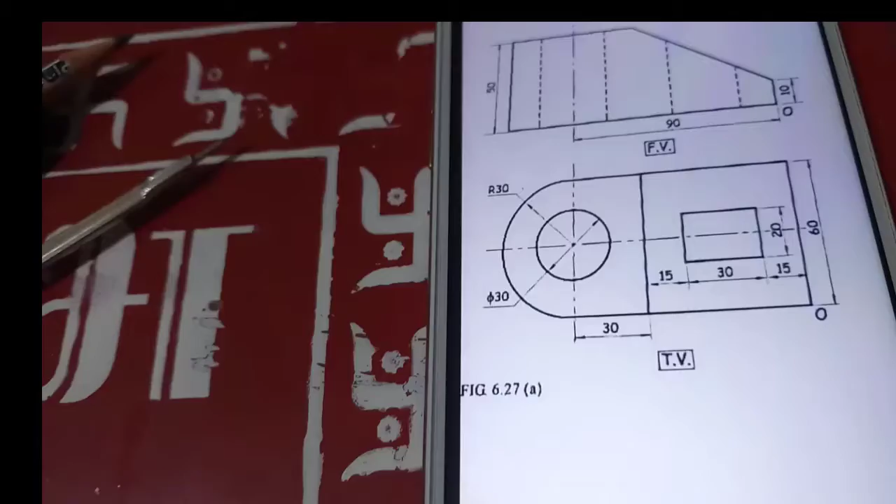Okay, so dear students, let us see this isometric figure, this orthographic figure. So in this isometric drawing, first of all you have to draw the rectangular box. So in that you should know the length, width and height of the box.

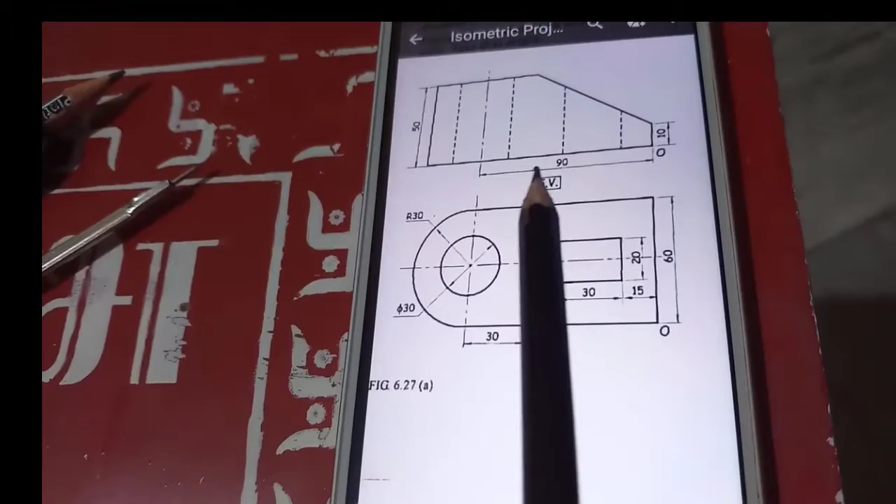First of all, see, you have to see the front view. From front view you will always get the length. So 90 distance is given, and from here till here the distance is given as radius 30. So 90 plus 30 is 120. First I will write down the length as 120.

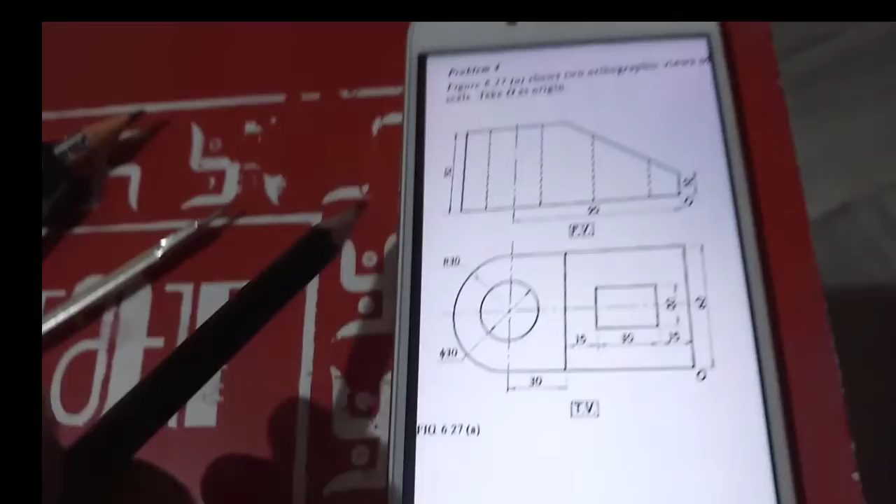Now see what is the height of the figure. It is 50, it is given. So height of the figure I am writing as h is 50. Then what is the width of the figure? Width always you will get it from the top view. So if radius is 30, both sides 30 plus 30 is 60. So width of the figure I will write as 60.

So first we will start with a rectangular box. I will mark one point O. This is our observer. Now you have to see on which side.

The length is 120. So where is the observer? Please look here in this figure. Observer is on the right hand side. So 120 length is on the left side. So from here now we will take 120 length.

First we will set the drafter at an angle of 30 degree. If I set here 60, it is 30 on the next side. So with help of drafter it is very easy. Just see, 120 length I am taking, and on this side also. This is our horizontal line. Both the sides you have to take 30 degree angle.

So what is the width of the figure? Width of the figure is 60. So from here you have to take 60 mm distance. And what is the height of the figure? Height of the figure is 50 mm. So keep your drafter like this and take 50 mm distance. So whenever you are drawing isometric drawing, it is very easy if you use a drafter.

Drafter is useful to draw the parallel line. So here 60 mm we have taken, so here also I will draw 60 mm line. Then here already we have drawn a parallel line of 120 mm. So take parallel to this line like this with the help of drafter, 120 mm distance again I am drawing.

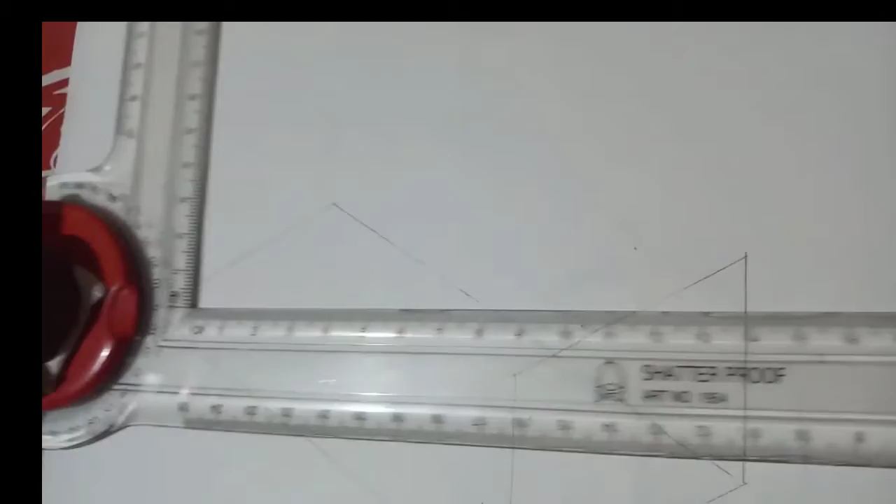Then we have to take parallel to this distance. So 60 mm distance also we have taken. Then draw 50 mm height from here. So from here we have drawn 50 mm. From here also we have drawn 50 mm.

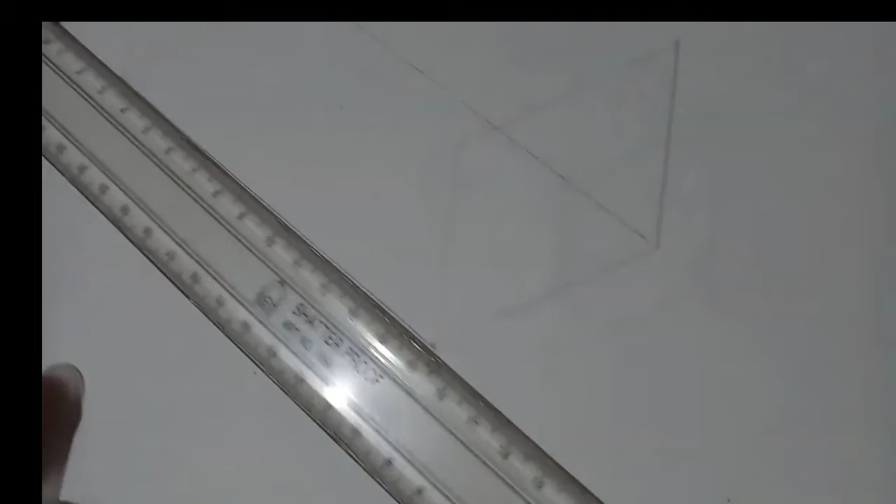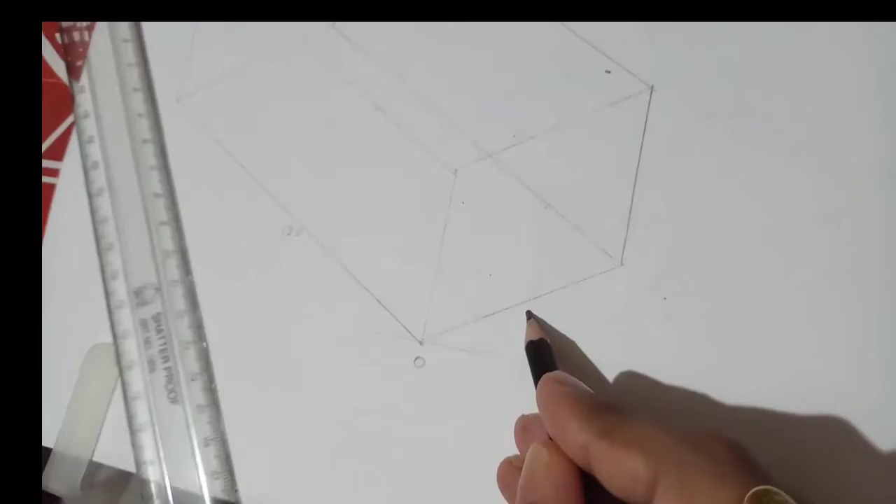So now our box is getting complete. We will set my drafter like this, and with the help of drafter we will join it. Yes, so all of you can see I have drawn the complete box. Length of this box is 120 and this distance is 60, that we have got it from the top view, and height is 50.

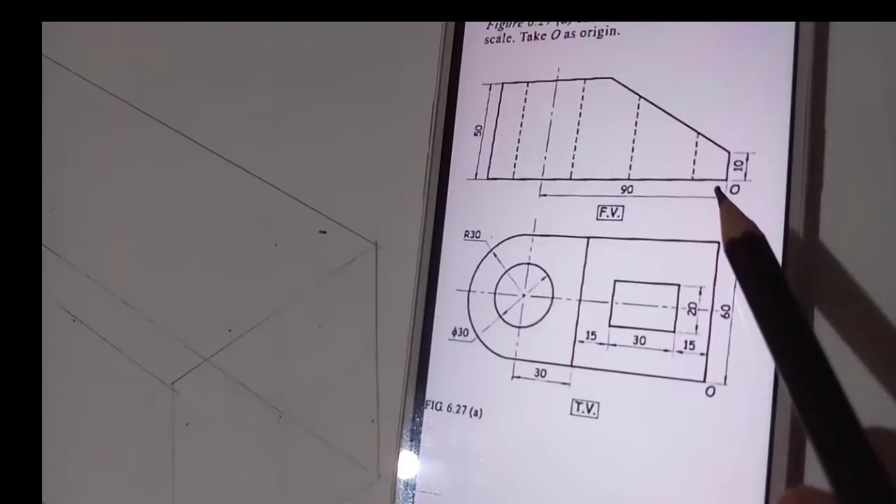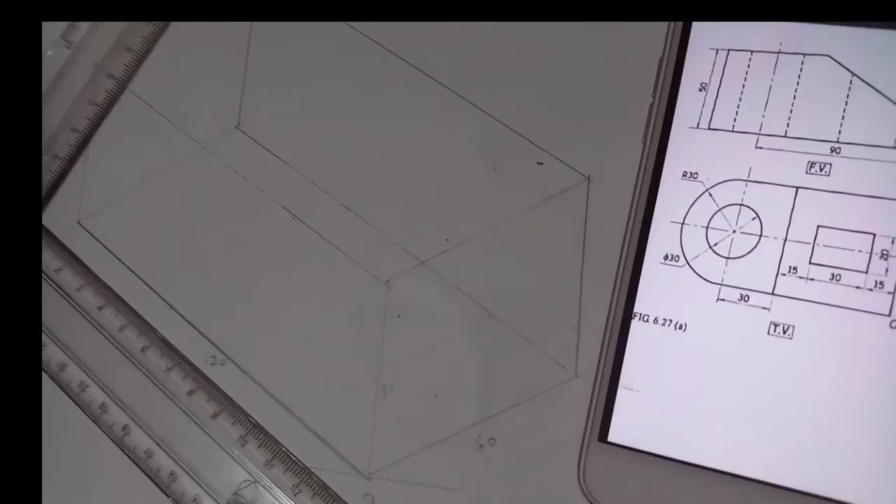So after completing this box, now you have to see this figure. If you see the figure, what is given? Now in this, observer is here, so from observer first we will draw the front view as it is. So we will draw 120 mm length from here. I will darken it up. So 120 mm dark line I have drawn. First to draw the front view of the figure as it is, so front view we will draw as it is.

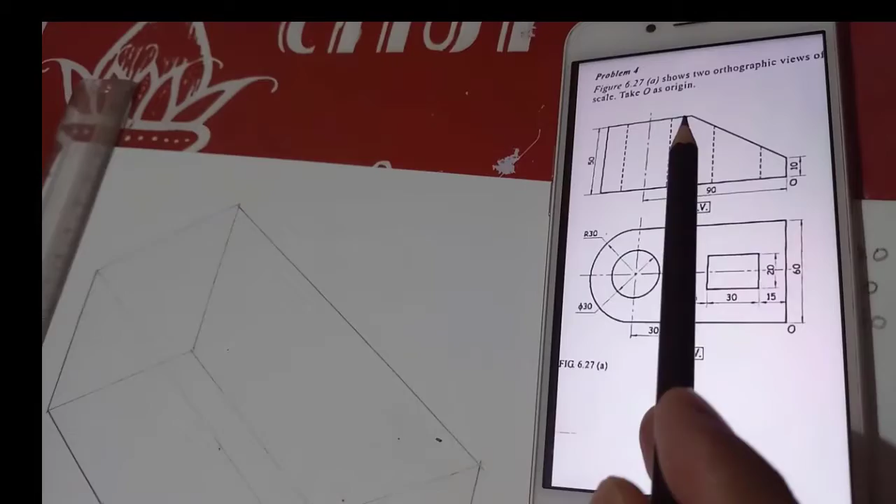Then this distance is given. After that, from this corner, from this corner we are taking distance of how much? This distance is 60 mm. From here till here distance is 60. So after coming to this corner, I will draw a 60 mm distance.

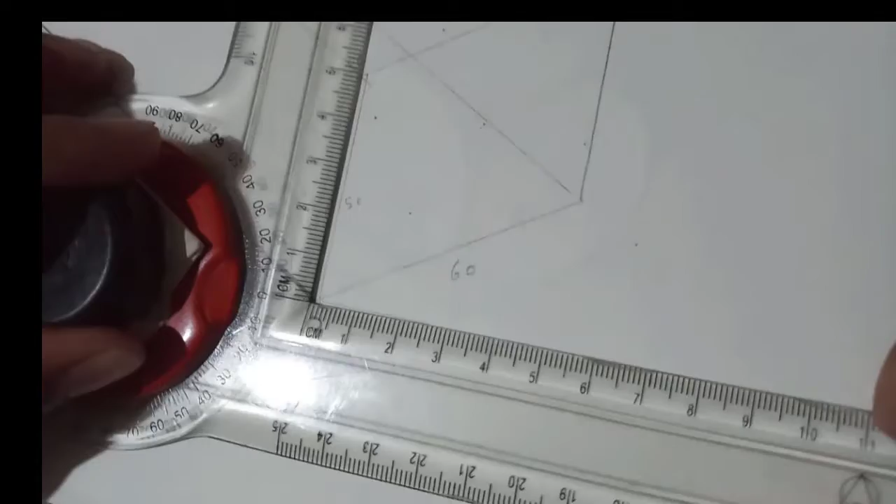Okay, and then here we have a corner, and after that in the figure you have a 10 mm height. If you see the figure here, there is 10 mm height given in the front view. So after that I will join this from here till here.

So here you can see I have completed the front view as it is. Now by seeing the front view you will come to know wherever you are having the corner, on the next end you will have a dark line from this corner. So I will draw one dark line here.

And from this corner I will draw one more dark line here. And from here also, if you see the top view, just draw the parallel lines.

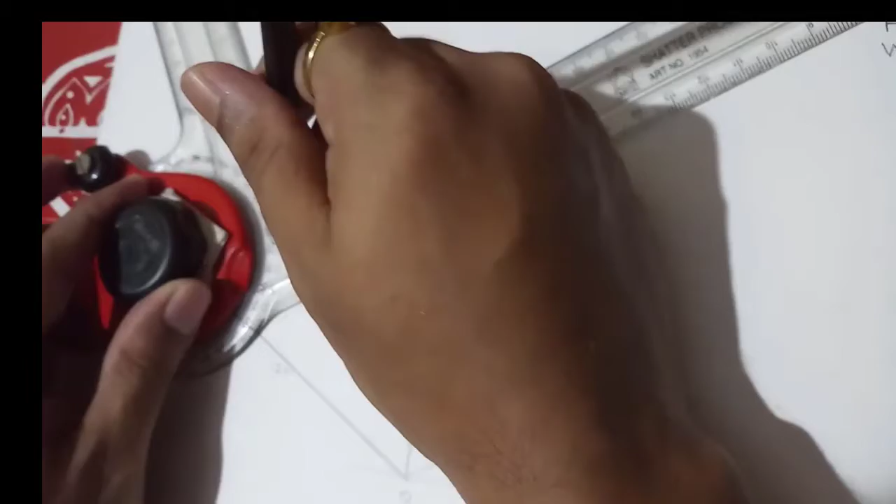So from here see the top view and draw a 60 mm line. So after seeing the top view and front view, here you have the semicircle, and here the inclined line, the inclined flat surface will appear as a plane surface here.

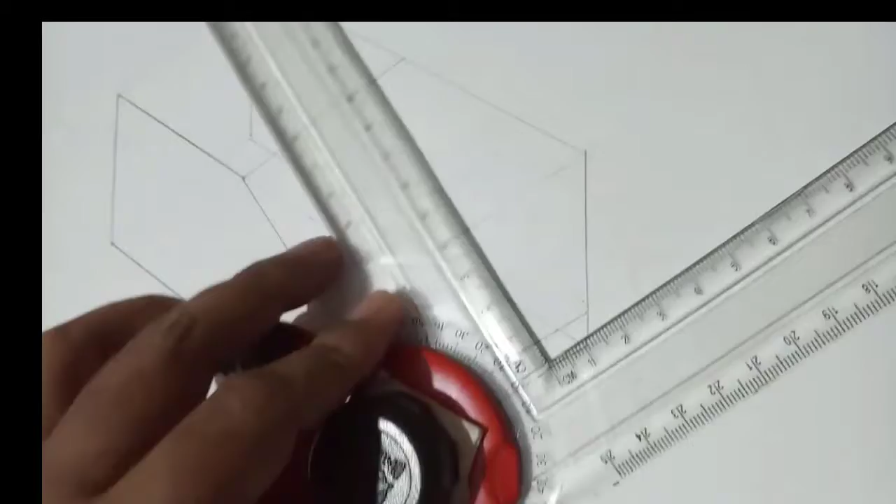But by seeing the front view you come to know that it is not a flat surface, it is an inclined surface. So here I will take parallel to this, and then I will join from here till here. From this point to this point we have joined it.

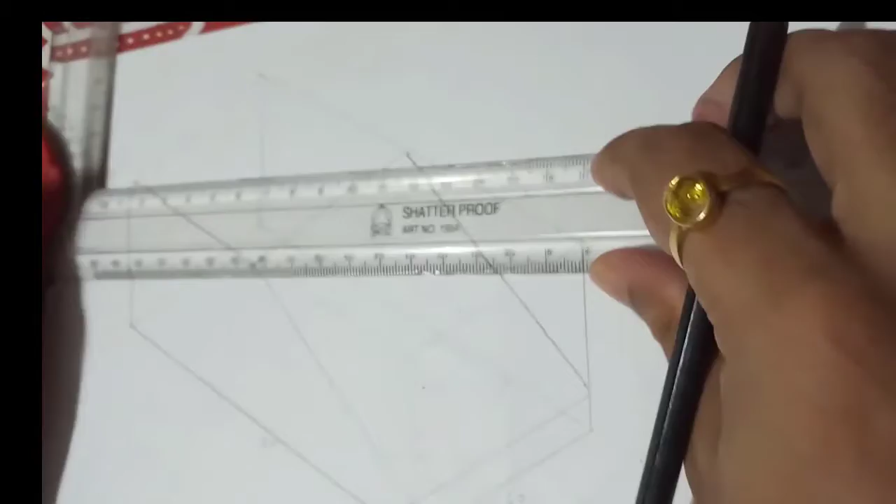After drawing this, now you know that here we have a semicircle. So here first of all we have to draw the isometric circle. So as I told you in the previous lecture, we have to join the longest diagonal. So this is the longest diagonal of the figure, and you should know what are the midpoints.

So 60 mm ka midpoint is how much? That is 30. So I will mark the midpoint here. We are getting midpoint as 30 mm. Here also you know the midpoint, it is 30 mm here.

And here where is the midpoint? For this figure, here midpoint is somewhere here, 30. And here midpoint is 30 mm. It is somewhere here. Then after that I have told you that you have to join the diagonal.

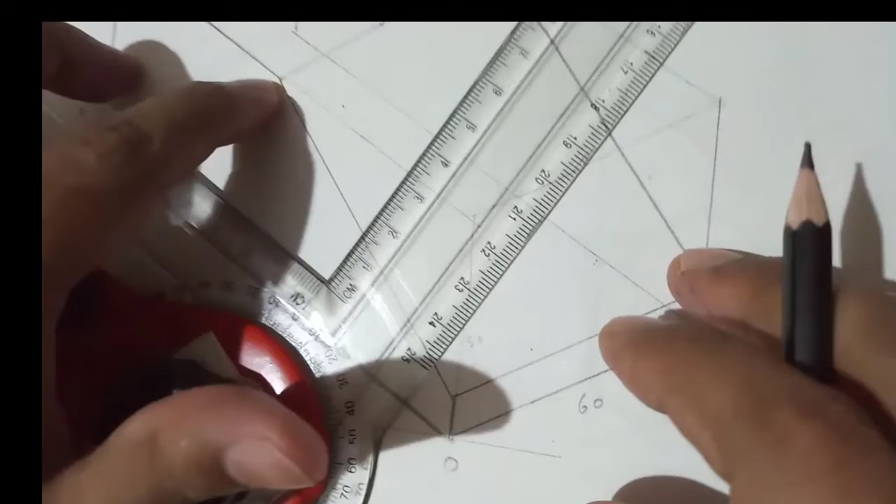The shorter diagonal and midpoint of the opposite side. So here I will join it. The shorter diagonal and midpoint of the opposite side.

If you join the shorter diagonal and midpoint of the opposite side, so shorter diagonal is this one and midpoint of the opposite side we are joining it. So here we have got the centers now for the figure.

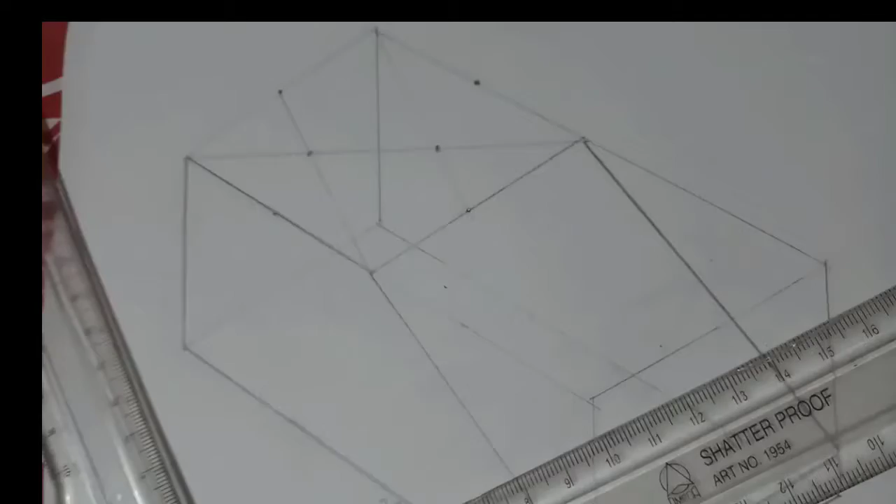So after getting the center, now what we have to do, we have to draw the isocircle of 30 mm, radius 30. So first I will keep my compass here, and from here till here we are drawing the first curve.

Then I will keep my compass here. This is the next center of the isocircle. So here we have completed the semicircle.

So after completing this, now you know that after seeing the figure, this thing which is appearing like a rectangle, but actually it is a curved path. So first of all you have to project this center also down 50 mm. What is the height of the figure? It is 50 mm.

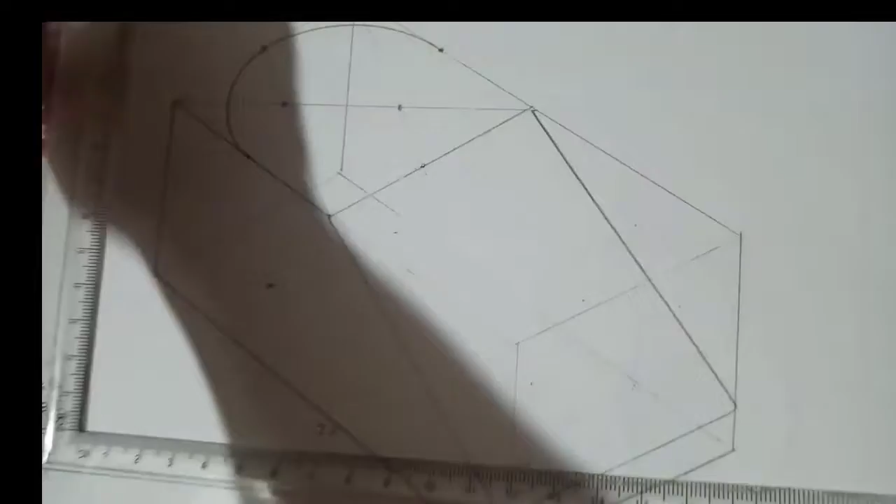So you have to project it at a distance of 50 mm from here. Just project the center. So I will project the center here at a distance of 50 mm. You can see I have projected the center. And then what I will do, I will draw the curve as it is, as I have drawn it earlier at the top.

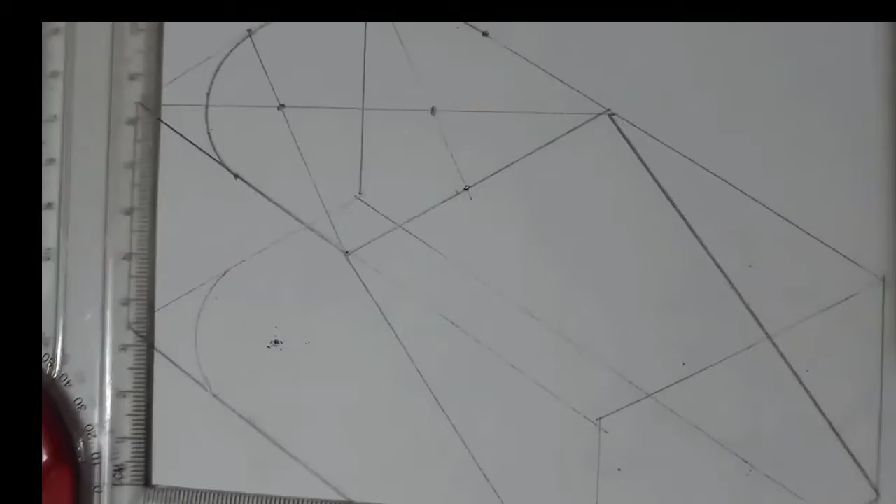So similarly I will keep my compass here and I will draw the curve. So from here till here you will have a curve like this. So after drawing this curve we come to know that our figure will be something like this. If we join the figure from the top, so it will come like this.

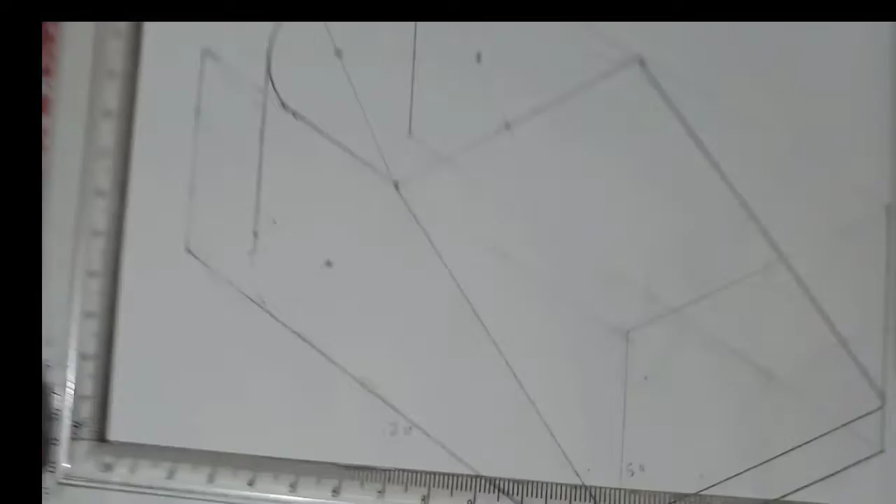So I will erase this part of curve and this part will not be existing. So I will make this part light. So now this is my actual figure and here we will make it dark.

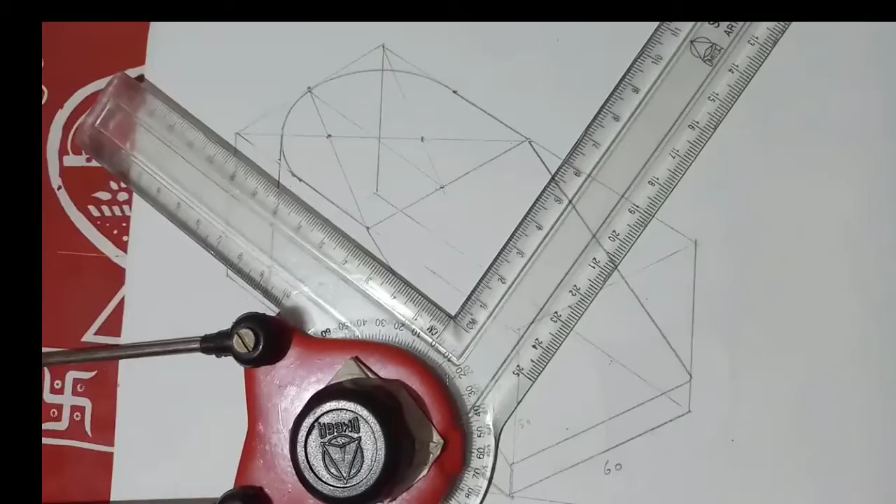Okay, so we have completed this first part, and now after this you can see that there is one more circle. Inside again we will draw one more rhombus inside this. So we have to draw a rhombus, you know, inside circle diameter is 30 mm, so we have to draw a rhombus of 30 mm.

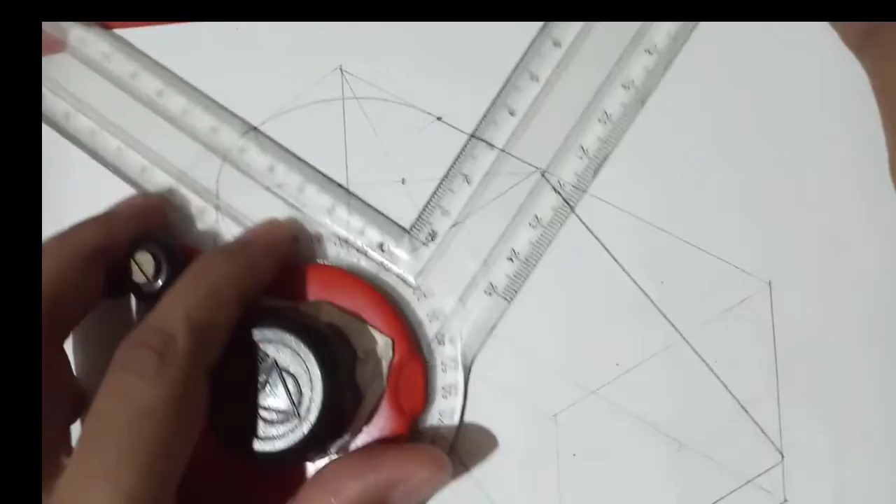So now what we need to do, first we need to mark the center. So center points we will join. Okay, so I have joined the center points. Now after this we will mark 30 mm ka distance on all the sides. So 15, 15, 30.

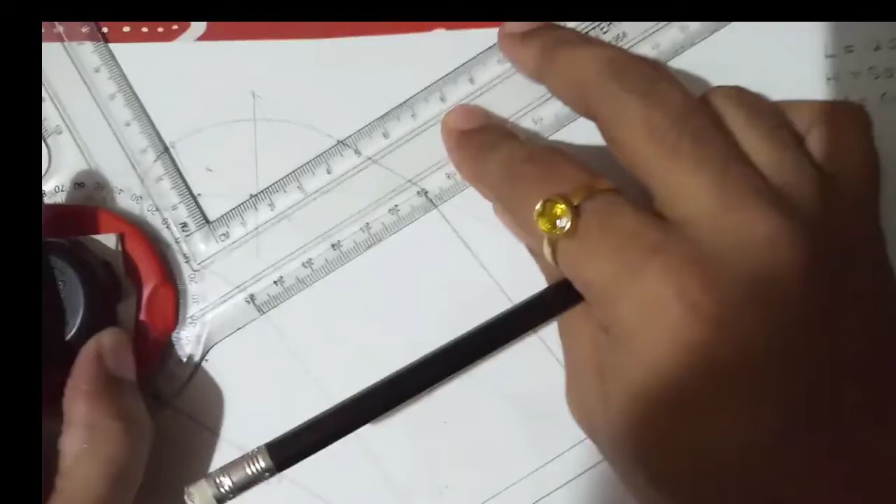Okay, so the rhombus which you are going to draw, you have to draw parallel to this line. So first I will draw this like this.

30. Okay, and I will keep my drafter here and again 30. Then we have to take parallel to this line, then again 30 mm distance from here till here, and then 30 mm distance from here till here.

So you can see I have completed the rhombus and this is the longest diagonal in the rhombus. Now these two are the shorter diagonals, so you have to join the shorter diagonal and midpoint of the opposite side. So shorter diagonal and midpoint of the opposite side we will join.

So it is somewhere here. So I am getting first center here. And again shorter diagonal and, as I told you, midpoint of the opposite side. So I have got the centers.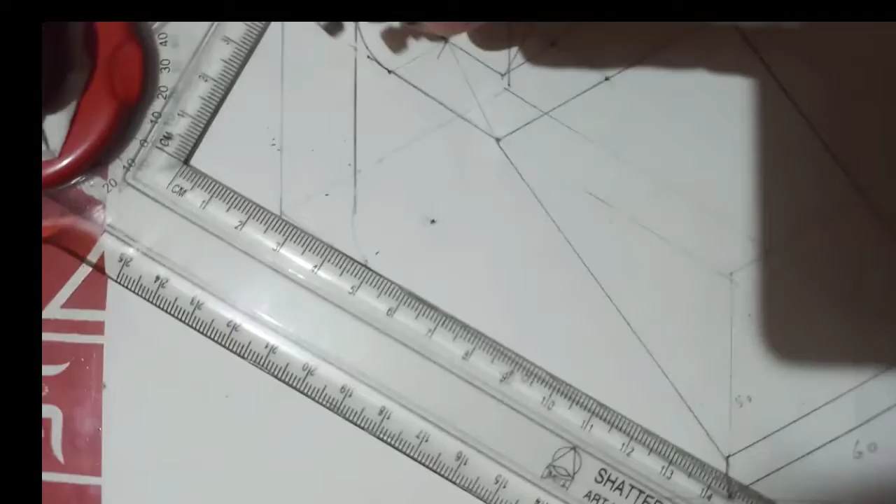Now it is very simple. You have to just keep your compass here and then take this as the radius, from here till here, then draw the curve like this.

Then keep your compass here, don't change the radius, keep the radius as it is. I will keep my compass here, keeping the radius same, then draw the curve.

Then after that keep your compass at this center. Next two centers are the smaller diagonals of the rhombus. So keeping this as the distance, I will draw this circle. And then I will take this as the center, keeping my compass here. So here we have completed that circle.

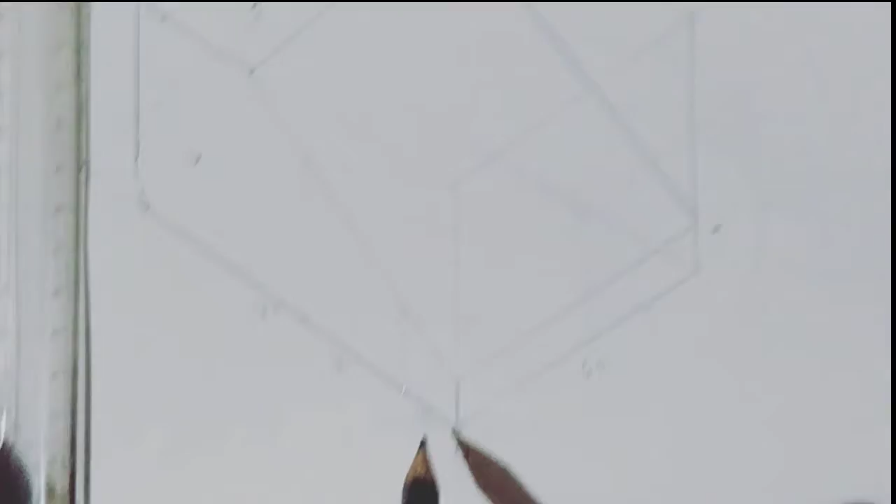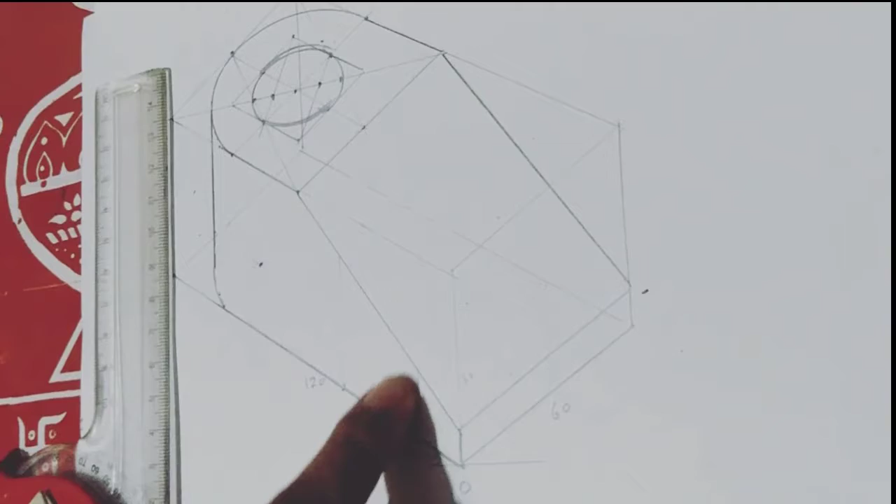Okay, so if you see the front view of the figure, from here at this point, this distance in the front view is given as 15 mm, and from here till here the distance is given as 30 mm. So first I am drawing taking distance of 15 mm and I am just projecting it here, and take distance of 30 mm from here till here and then project it here.

After that, with the help of your drafter or roller scale, you can just draw parallel line from this plane. From here till here I have drawn the parallel line, and again from here till here, from this point to this point I will draw the parallel line.

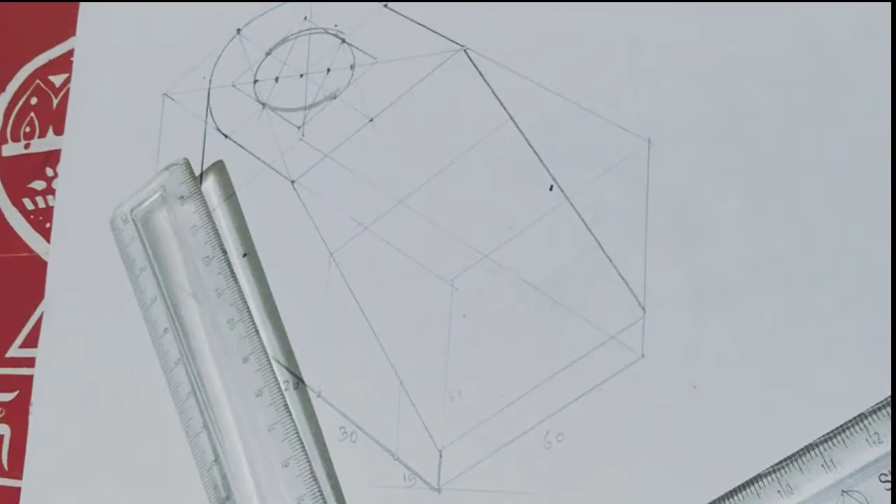After drawing this parallel line, then I am just with very light lines we will draw, we will join the center also. So from here we are just joining the center.

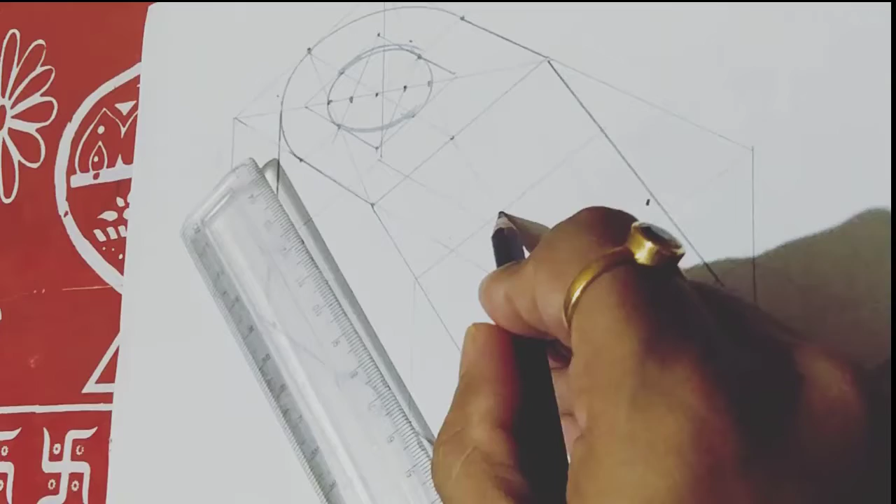Now if you see the top view, on both the ends it is given 10 mm on this side, and here there is a slot given, so it is 10 mm on this side and 10 mm on this side. So both the sides 10 mm it is given. So I will keep my drafter here and I will draw this 20 mm slot here. 10 mm on both the sides, here also 10 mm on both the sides.

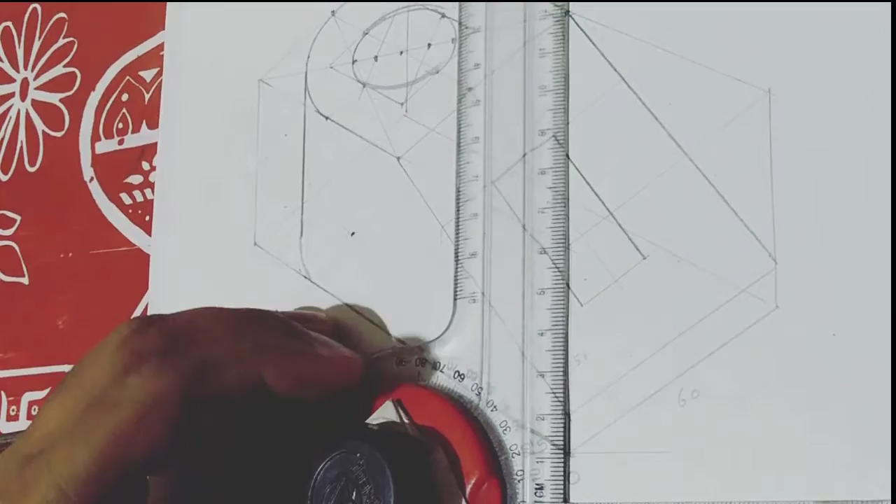Then take parallel to this plane like this and then join it. So after drawing this, then again set your drafter again at 0, parallel to this line. Then here also we have a corner, so from this corner till here you will have a dark line like this. So we have completed the complete isometric figure.

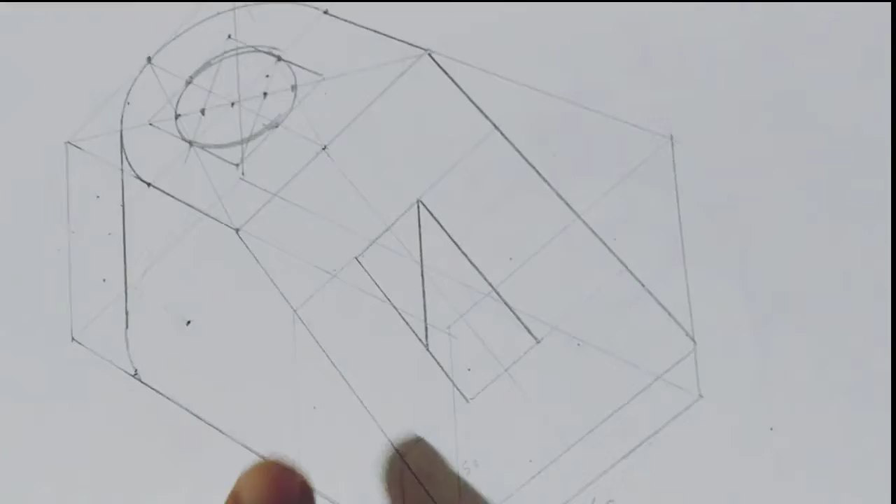So I hope that in this video I have taught you how to draw the isometric circle, and how to draw the curve here also. This should be very light. Your actual figure, this is your existing figure, that should be dark.

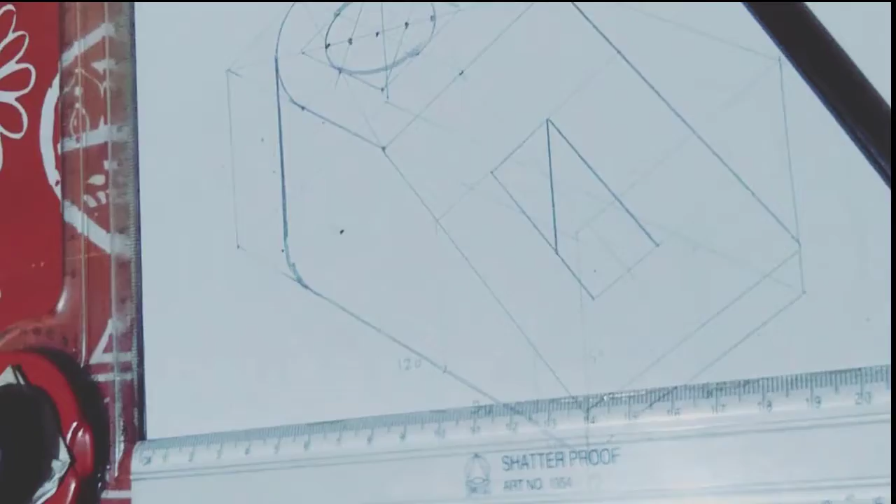So with the help of this compass, whatever radius you have taken here at the top, same, just we have projected the distance and we have drawn the curve here. So here, in this figure we have completed the drawing.

So our isometric drawing is complete.